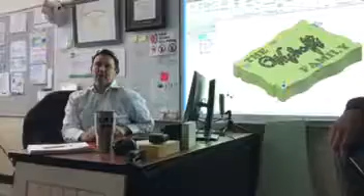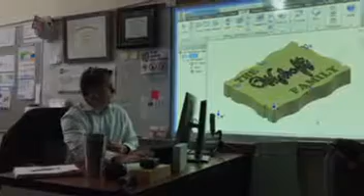You can post-process those files, save them, and open them in CNC Motion to simulate your code working properly. The first file should be your top of your lid, with just the engraving only.

If I were to simulate that, select Setup, Simulate, and if you want the stock around it, you choose Stock and Mode, 3-Axis Fast, and then you can simulate it. Just speed it along.

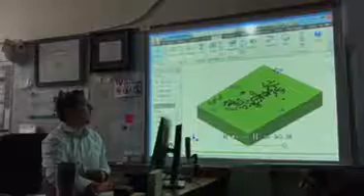And so all it should be is just the engraving, that's it. Okay, your engraving works out.

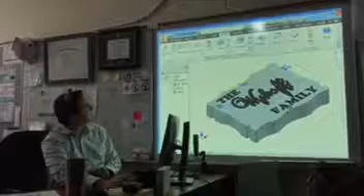Close that, and you do the post-process. Select your setup and post-process. There it is right there, post-process. And just like the other video and the guide, it tells you to put certain settings in to generate that code. Okay, so that's file 1.

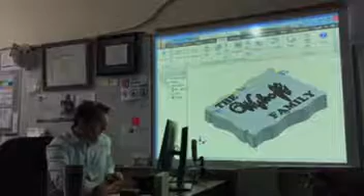File 2 is the bottom of your lid. What's the difference between this file and this file? This one doesn't have an engraving.

So the setup is different. The Y is on the short side, the X is on the long side, and Z is up on the top part of the lid.

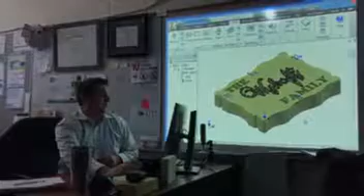On the bottom side of the lid, I did a new setup. So the setup is now on the top side of the bottom of the lid. And again, the Y is pointing in the direction of the short side, X is the long side, Z is up. That's important, or it won't process correctly.

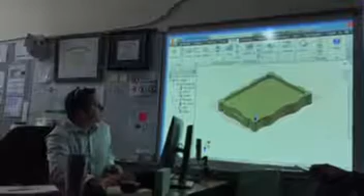I used a 2D adaptive process with a 1/4 inch end mill, tool 2, to do the outside edges. I just chose the bottom surface and it cuts the whole profile out on the sides. You do the same for your sides.

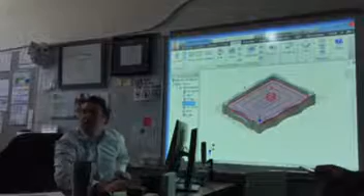For the pocket, I used 2D pocket and chose the bottom surface to cut out the middle.

And now if I choose Setup 2 and Simulate, speed it up, it shows exactly what you want.

Third file, last file, is your base. Notice the setup: Y is on the short side, X is on the long side, Z is up.

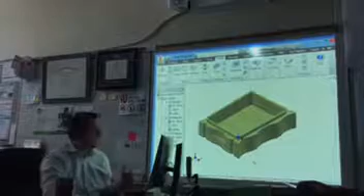I used a pocket in the center, an adaptive process for the sides, and I have holes, so I drilled those holes out. You don't have them, so don't worry about the drill operation.

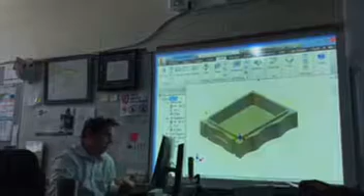If you want to simulate one at a time, you just select them and simulate them, or simulate the whole setup. Simulate, and then make sure you get what you need.

And that looks good. Then you post-process each file, just like I told you to before, same settings, and open those files up in CNC Motion and test your code to see if it works.

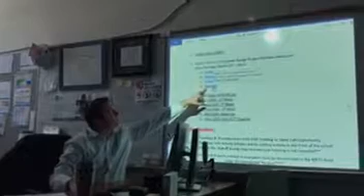And if it works, you build your portfolio just like the example I gave to you right here. Okay? That's it.